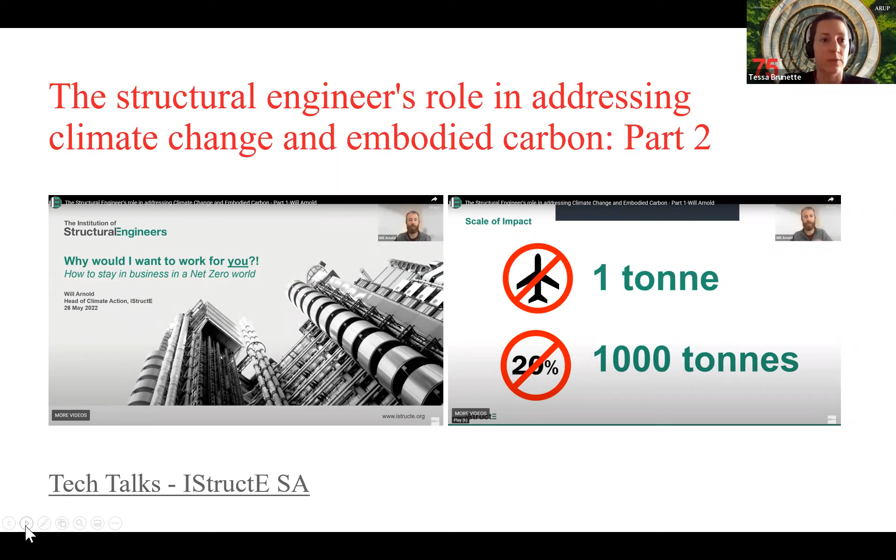It's really such an important topic, and I really want to stress the role that structural engineers can play. I would say that if you haven't listened to that, please do so. We've put a link in this talk, but equally I'm sure that Chris and his colleagues can put that in the chat as well, because the recording is available online. So I'd encourage everyone to listen to that if you have not already.

So today we're going to be doing a little bit of scene setting, just reinforcing some of the messages that Will gave last week, as well as then going through the unique content for this talk, where we'll be talking about some embodied carbon calculations that we've done for projects in South Africa. We'll then be talking about country-specific carbon factors and why that's important. And then we're going to talk through some of the research that we at Arup have done for location-specific carbon factors for 5 countries in Africa, but we'll just be using some examples from that.

Then we'll talk a little bit about some examples and some guidelines around where the best opportunities are to cut carbon. And then we're going to talk about, well, what next? What does that mean for all of you and all of us working in industry during this important time where climate action is so critical?

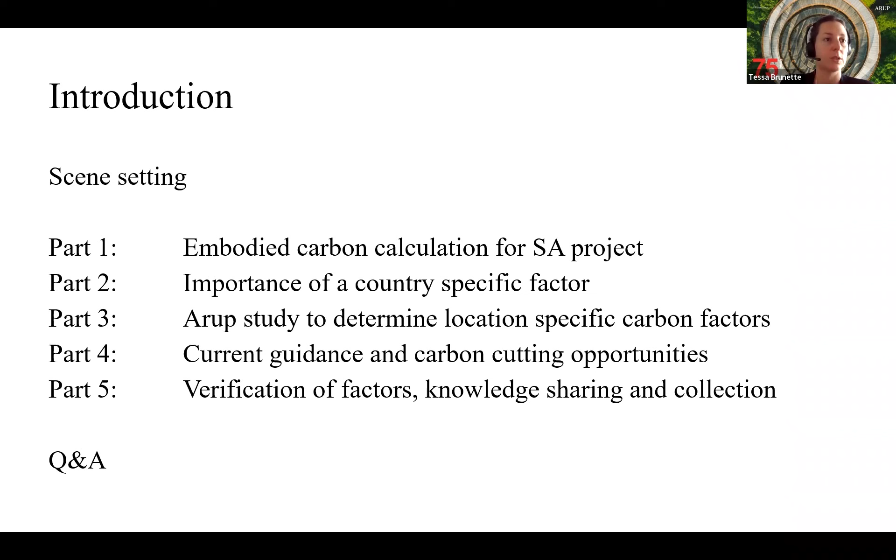So today we've got Suvarna, myself, Fiona, Maureen, and Alex talking. Suvarna, Fiona, and Alex are all based in South Africa. Maureen is in Nigeria, and I am operating between the UK and South Africa.

So a little bit of an introduction to the carbon assessment process. This is a described and defined workflow that is described in many places. RICS, for instance, has a really good workflow, as does the IStructE. All of this information is available online, and we'll give some links later on.

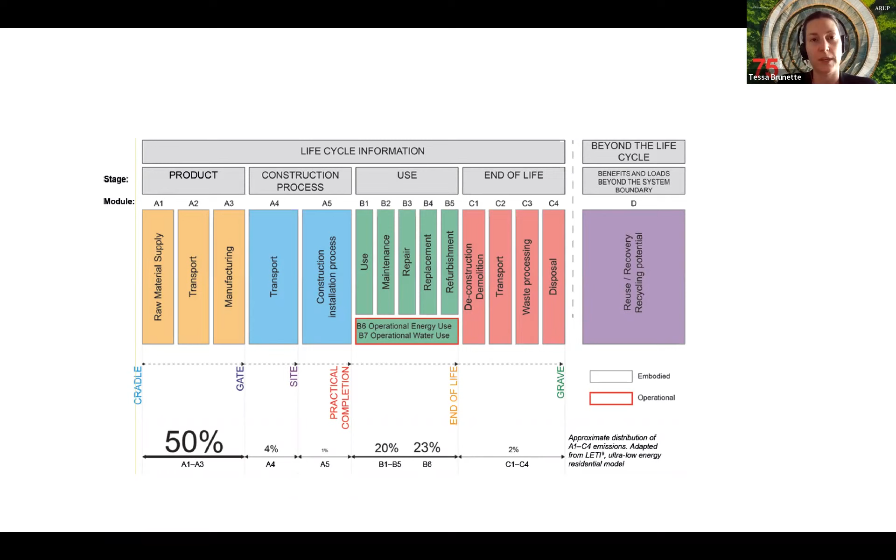But in essence, what this process does is measure whole life carbon. Within that, we have all these words: operational carbon, embodied carbon, and other related words that do have a risk of becoming jargon. What we're going to talk about today is in fact the embodied carbon component - looking at, I'm not going to use all of the letters because you can see it on the screen, but in essence what that is looking at is the materials, where they come from, how they are transported to site, and how they're installed on site.

In terms of jargon busting, there's a big risk of lots of words we don't understand necessarily. When we talk about carbon emissions in this setting, the word carbon has become jargon, although carbon is clearly an element. When we speak about it in this decarbonization setting, it should be viewed as interchangeable with greenhouse gas emissions, or GHG for short. Carbon has just become an easier word to throw into sentences.

This is the emission of gases, including carbon dioxide, methane, and water vapor, measured in carbon dioxide equivalent units. So when you see this little series of letters, really that's GHG as well.

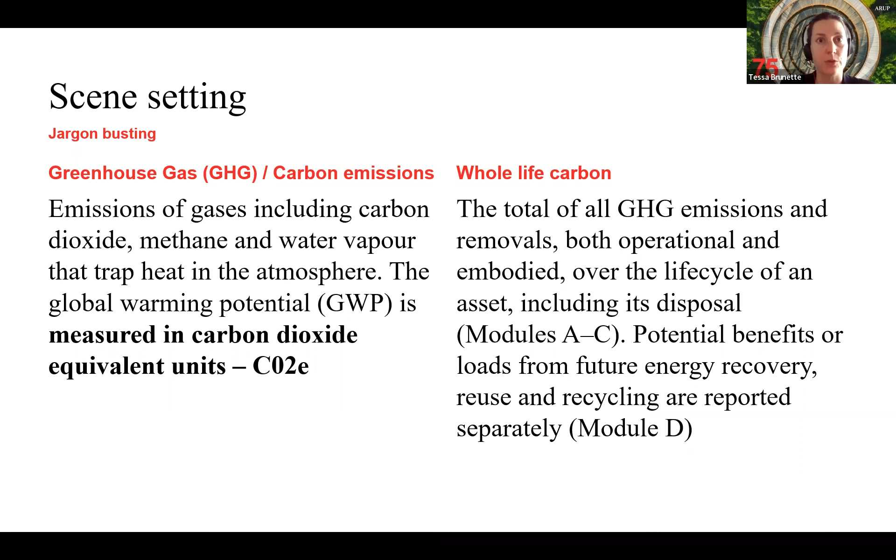Whole life carbon takes into consideration all of these GHG emissions and removals, considering operational and embodied carbon over the life of an asset, including its disposal. So if we look back at this diagram, whole life carbon is considering every single one of these pieces here.

In terms of embodied carbon, that refers to the greenhouse gas emissions associated with the materials and construction processes from A1 to C4 on that diagram we had earlier. Embodied carbon is the focus of structural engineering, because this looks at the materials that are used to build the building.

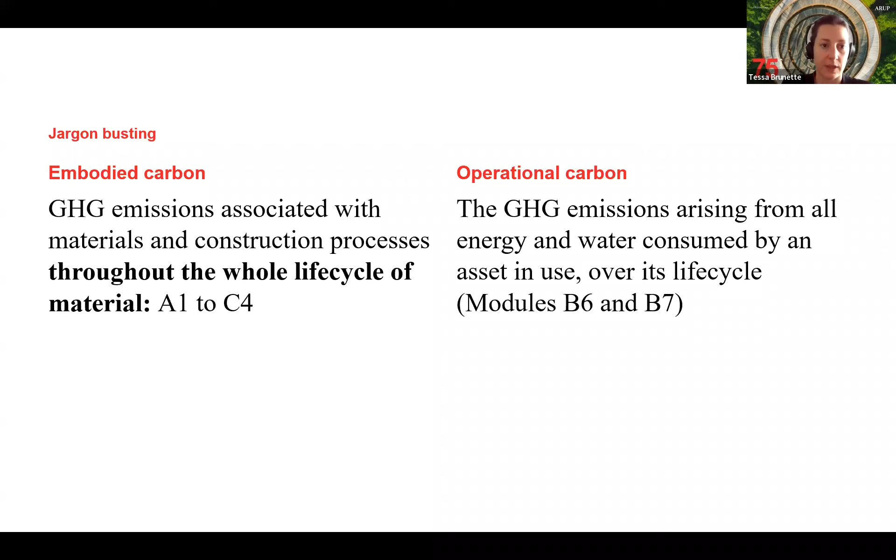Whereas operational carbon really is the realm of our mechanical, electrical, and public health or wet services colleagues, and that looks at the greenhouse gas emissions that arise from the energy and water consumed by a building in its use over its life cycle. So that's operational and embodied carbon.

In terms of embodied carbon decision-making, Will showed this decision-making tree in his talk last week. Essentially, as structural engineers and in our role influencing the design process, we need to be cognizant of when we are building, why we are building, and what we're building. So we start by asking do we need to build anything? Then how much do we need to build? Then we think about building clever, then we build efficiently, and as a last step, we minimize waste.

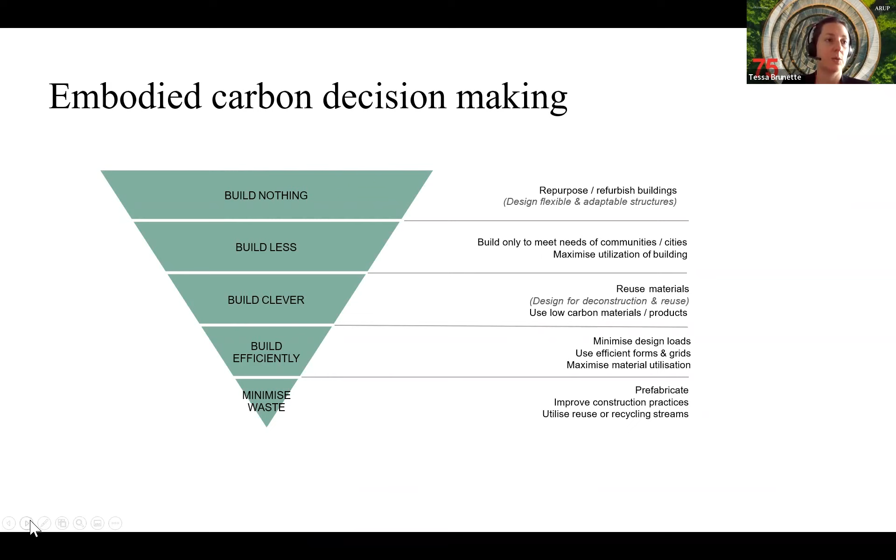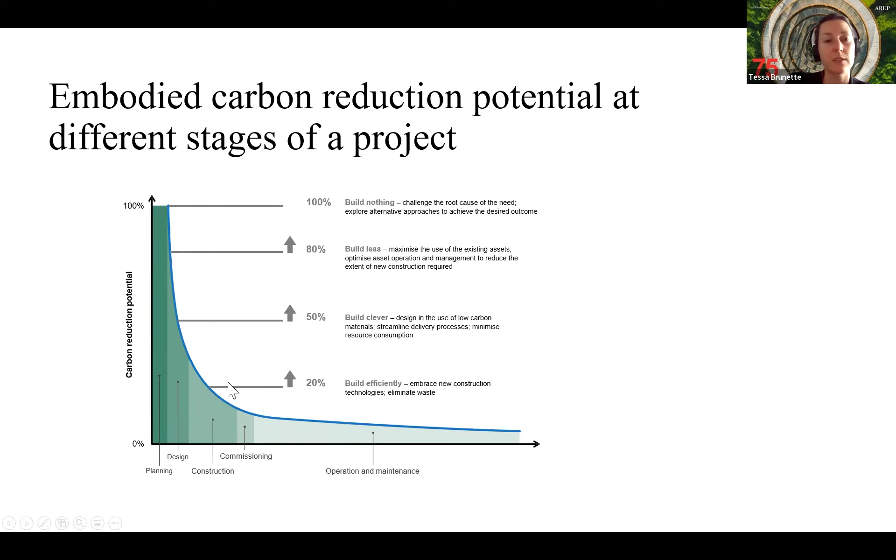It's really important to remember that the biggest impact we can have as structural engineers is actually by building nothing. So we all need to be asking these questions clearly of ourselves, our design teams, and our clients. It's also a reminder that the biggest impact we can have is at the beginning of a project. As we go down the project process, we can have an impact every step of the way, but the impacts right at the beginning will be the biggest ones, with the most impact. So the earlier our engagement is, and the earlier we start asking these questions, the better the outcome will be.

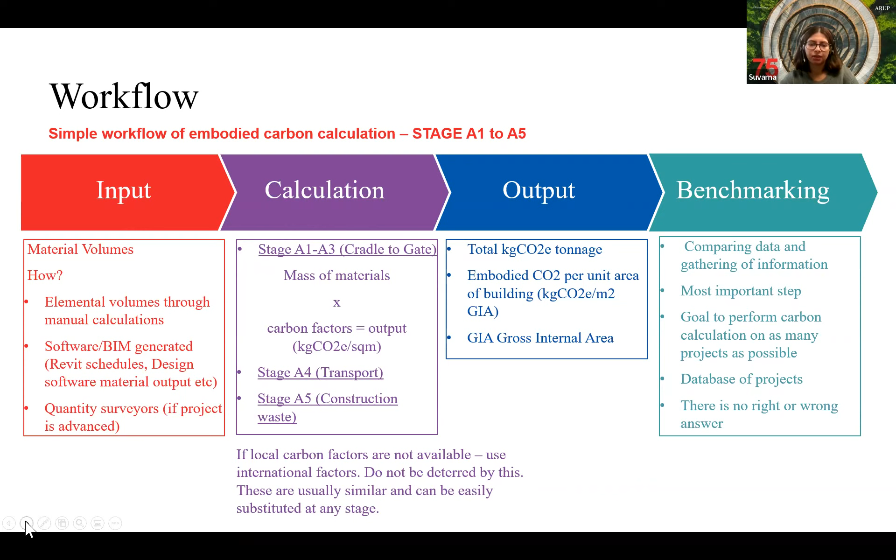Next slide. Now I'll run through an example of a residential building I did recently at tender stage. The site contained 3 apartment blocks, but for now the calculation is based on block A only. The building is a concrete frame structure with post-tension slabs, stability shear walls, and pile foundations. It contains an open ground floor parking, 3 levels of apartments, and 1 roof level for plant equipment.

I obtained elemental concrete volumes of the superstructure, consisting of slabs, walls, beams, and columns, and the substructure, consisting of pile caps and piles. Again, this is a simple task and takes less than an hour to complete, depending on your building scale.

At this stage, I use reinforcement estimates based on the volume or area of concrete to obtain the total rebar tonnage. For the post-tensioning cables, I used a reinforcement carbon factor for the calculations, as I did not have a readily available PT carbon factor.

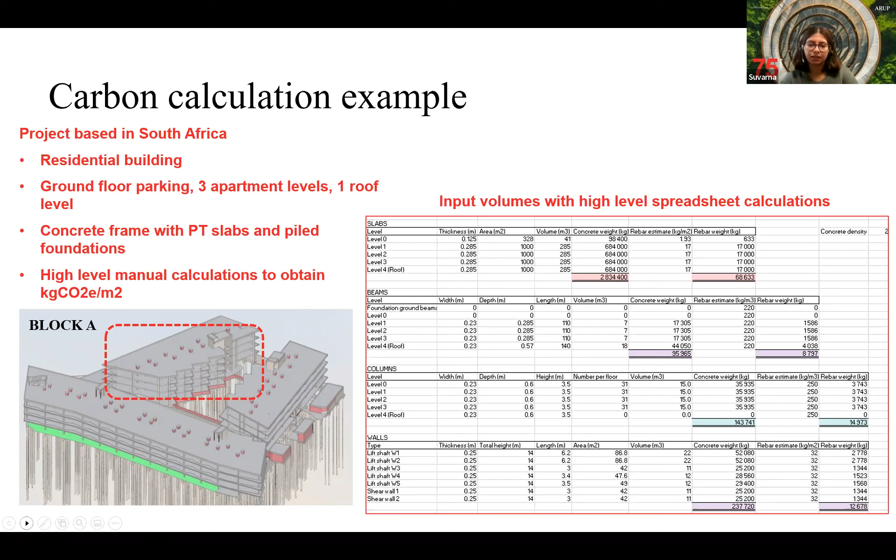Next slide, please. Once I obtained the material mass of the structure, I used a spreadsheet produced by Arup called PECC to apply the carbon factor calculation. This is one of many tools available, but is not required. The calculation remains the same.

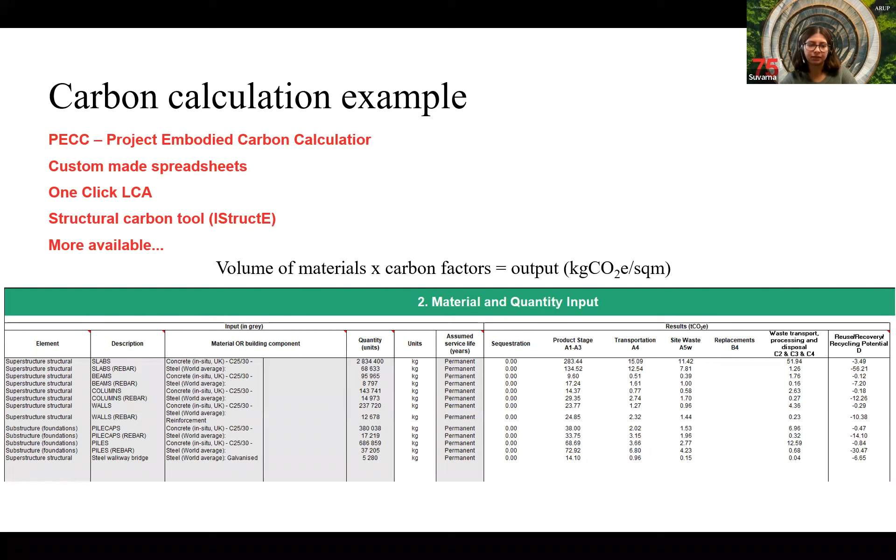At this point, I added some additional structural steel masses for canopies and walkways. Next slide, please. I calculated a total carbon tonnage of 856 tons and divided it by the GIA, which resulted in a value of 320 kilograms of carbon per meter squared.

On the right, the data is reflected in pie charts for context. The first pie chart indicates the distribution of carbon tonnage: 56% for concrete, 42% for reinforcement, and 2% for structural steel. The second chart has the material mass distribution: 96% for concrete, 4% for reinforcement, and a negligible amount of structural steel.

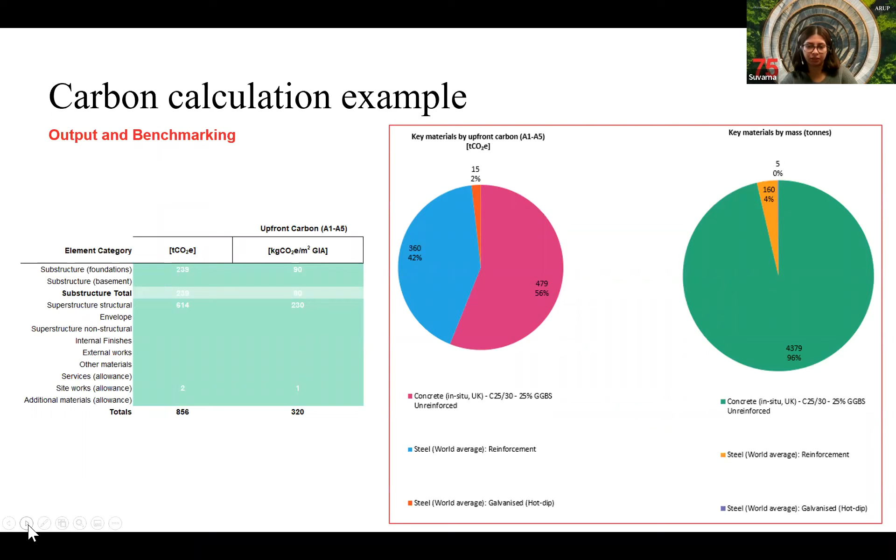Just from this data, I can see that just 4% of steel in total contributes to 44% of carbon tonnage due to its high carbon factor.

Next slide, please. I can now perform the final step of benchmarking and comparing my results. From the graph on the left, a range of values is shown in blue based on past projects. I use that to get an idea of where my building sits within this range.

I can see that I am within this, and I can now add my volumes to the same database to shape the range further, which is what our goal is, to basically benchmark against real life projects. I also use the SCORS rating system on the right, where I can see that my building falls within rating E, which aligns to a typical mid-rise building.

The next step for me is to adjust and track my calculations at different project stages, with the attempt to continuously reduce the impact the building has by making smart material and design choices. I just want to reiterate that the calculation is quite straightforward and makes the most impact when done right at the beginning. Thank you. Now I'll hand you over to Tessa.

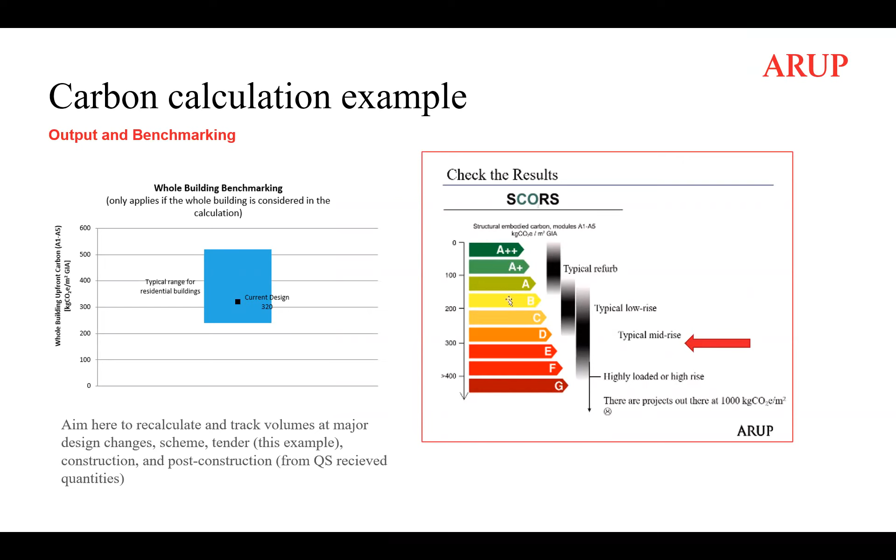Thanks, Suvarna. I'm trying to figure out how to start my camera, but I have no idea how. Start video, there we go.

Okay, thank you. So I'm going to be talking about the importance of a country-specific carbon factor. As Suvarna mentioned, she used UK-based factors in her calculation because they were readily available.

So it looks at this stage of the workflow. Essentially, we progress from the inputs, which is the design and the volumes of things. Then we do the calculation where we apply the carbon factor. Then in terms of the process, we look at the output, which is what Suvarna has described, and then conduct benchmarking. What's really important as part of this is this iterative process over the design process. So as we get to benchmarking, we can understand where our embodied carbon per square meter sits against other similar buildings, and we can actively seek ways to reduce the carbon in the building iteratively over the design life.

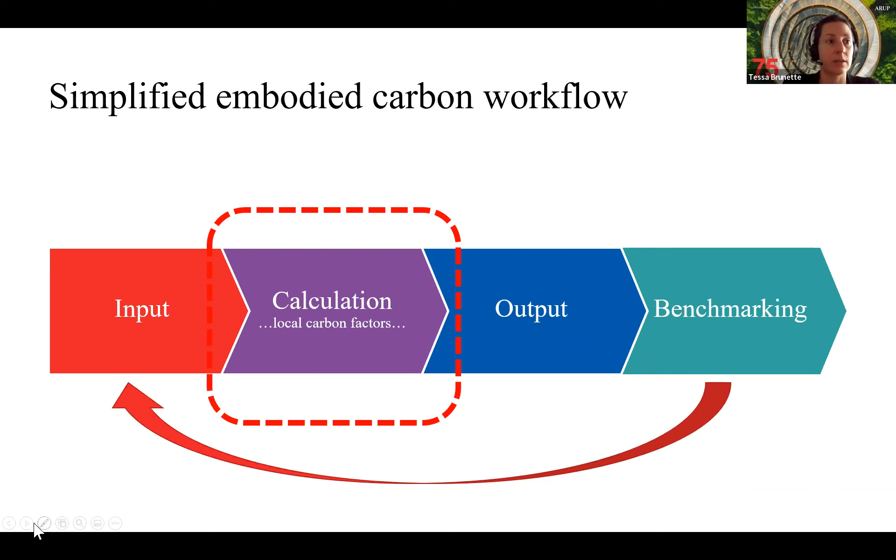So what we're going to focus on now is the calculation aspect and looking at local carbon factors. So a carbon factor, as a piece of jargon again, is the factor that's applied to the energy use or emission to understand the equivalent carbon emissions that are associated with it. And again, I just want to reinforce that this does include not only carbon, but nitrous oxide, I can't remember all of these things that are here, but it's a whole bunch of greenhouse gases, essentially.

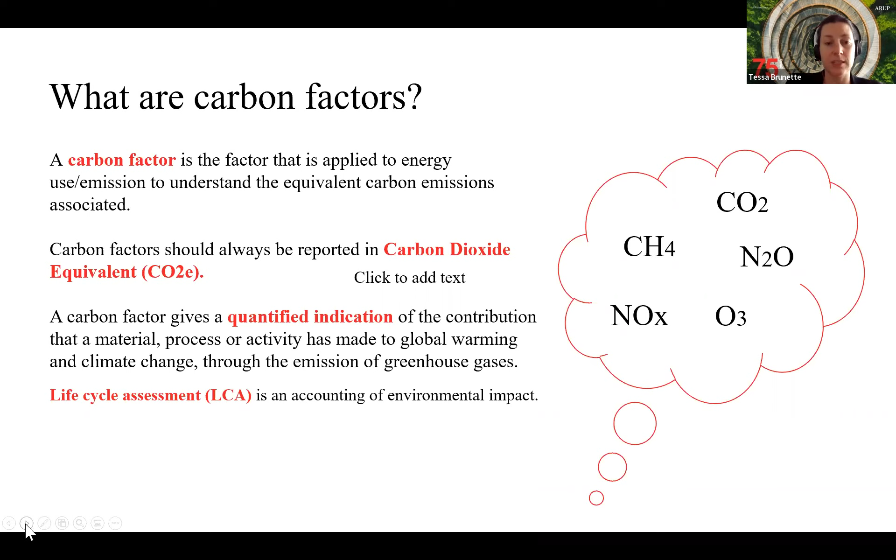They're always reported, however, as CO2e, which looks at the carbon dioxide equivalent. And this is looking at a quantified indication of the contribution that this material makes towards the global warming potential associated with greenhouse gases. And then another step in this process is looking at a life cycle assessment, and that's an accounting of the environmental impact. But again, we're looking at embodied carbon, so I'm just going to skim through that.

So key messages for this are that the carbon factors that we typically use and that are available in South Africa are largely generic. They can be UK based, they can be US based. They are internationally aggregated carbon factors. Thus far, we do not have any local carbon factors for any specific country, or in fact for the continent of Africa, that are available. If we consider that Africa has 54 countries, there's quite a lot going on there with a lot of regional variation. So these generic factors have been created by structural engineers and interested people around the world.

A lot of academics contribute to this. Equally, the building industry contributes to these carbon factors because many of the industry colleagues, they actually prepare things which are called EPDs for the various products and materials that they sell. And that means essentially that they go through the process of calculating the carbon factor for their specific product or material. So essentially, this takes into account where the specific material or product came from, what is the source of that, and all the transportation involved in its movement and its processing until it reaches site. That's what we're looking for. That is what the carbon factor looks at.

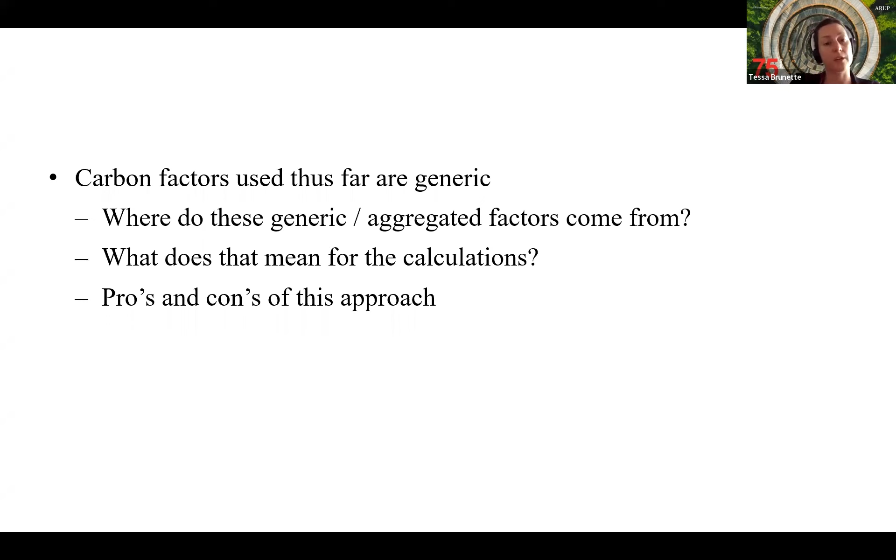In terms of carbon factors, international versus local, they are generally comparable. The differences tend to be related to transport. For instance, if we in South Africa are mining iron ore, sending it to Australia for processing and converting into steel, then shipping it back to South Africa before it's processed again and installed on a building, all of that transport adds to our specific carbon factor for South Africa. Whereas if it was all done in Australia, that carbon factor would be lower.

Another factor that tends to differ between local and international carbon factors is the grid energy supply. If you're using a fossil fuel-based electrical network for processing, that carries a higher carbon emission. Whereas if the energy mix is entirely or largely renewable, your carbon factor would be lower.

What we tend to see is that steel is similar across the world. However, there tends to be quite a bit of variation between products such as bricks, so masonry units vary quite a lot. Timber also varies, but we must remember that because of its property as a renewable resource, the sequestration attached to that product during its growth cycle is significant. So even when we add transportation onto that, the carbon factor of timber is still very low.

The key message here is that we need to understand what the material value chain is for each of the products in country, because we can then apply best practice and use our own engineering judgment to choose and decide on ways forward in support of embodied carbon calculations.

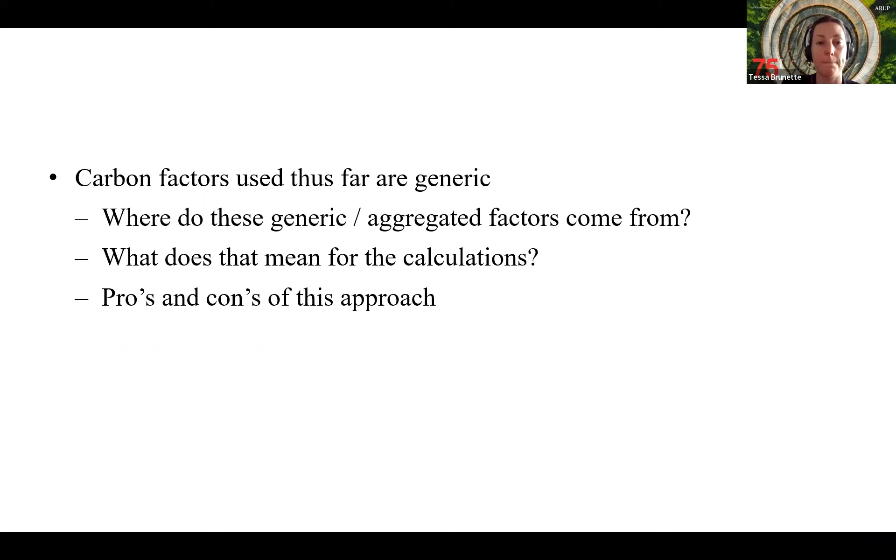Thank you, Tessa. So Arup, hi everyone. Arup, as part of their internal research program, have invested in two studies to better inform our drive and commitment to low carbon building design in Africa.

The aim of the study was to establish and validate a set of location-specific carbon factors, as Tessa just mentioned, for common construction materials. We focused on four countries where Arup currently have offices, namely Kenya, Mauritius, Nigeria, and South Africa.

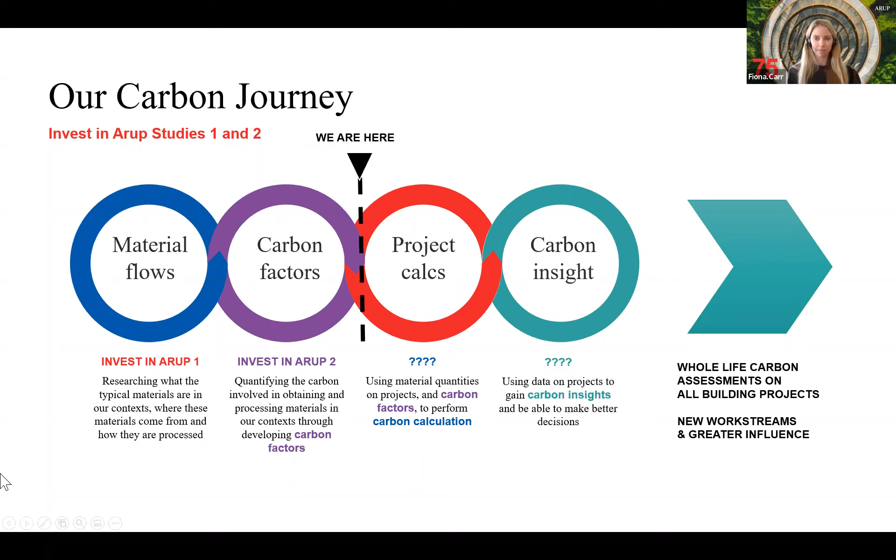I keep clicking. Sorry, I didn't realize there was a... There we go. Thank you.

The bespoke methodology we developed in study two was centered around three different ways to calculate a carbon factor, depending on the information available. These consisted of a location-specific factor, a blended factor, and/or an energy-tailored factor.

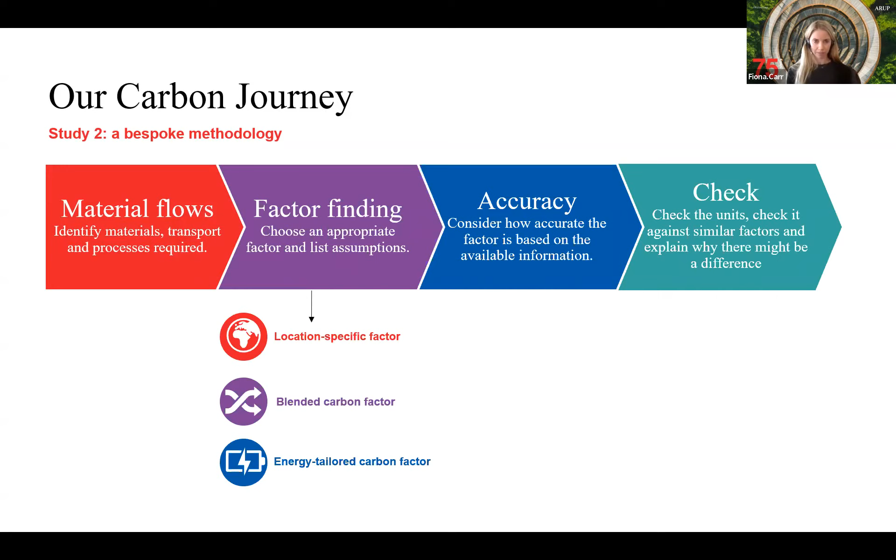Our guiding principles throughout the study were to remember that data collected needed to be from the correct, appropriate geographical region. We needed to remember that data collected should be representative of current technologies and processes used. Considering future technologies was not recommended during our study. We needed to remember that our data needed to be recent, and that thus far, the factor calculated is an estimate and a start to our carbon journey.

We needed to list all assumptions along the way and needed to note our level of accuracy when reporting any factors. We also needed to remember that this was an iterative process, that we couldn't get a perfect factor the first time, and that it is something that will need to be developed as we continue this journey.

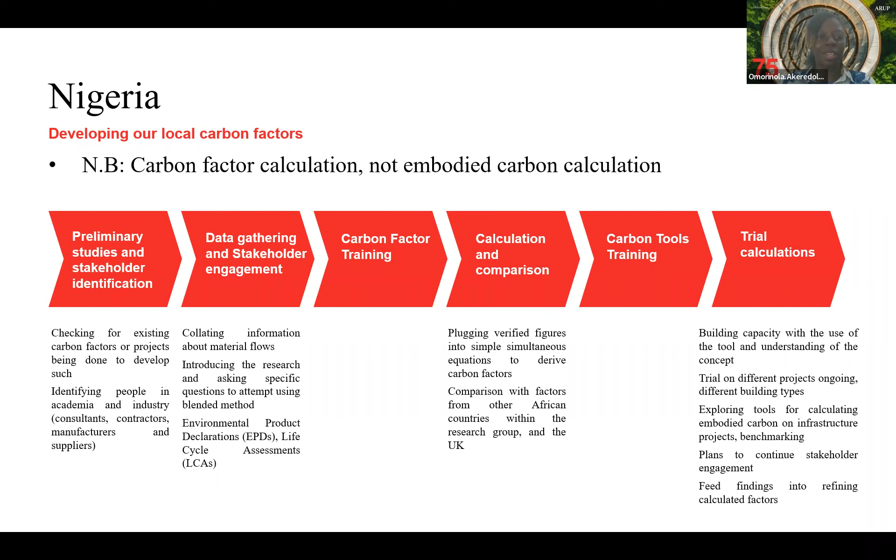The specific materials which we calculated carbon factors for in Nigeria are steel, concrete, blockwork, aggregate, and timber.

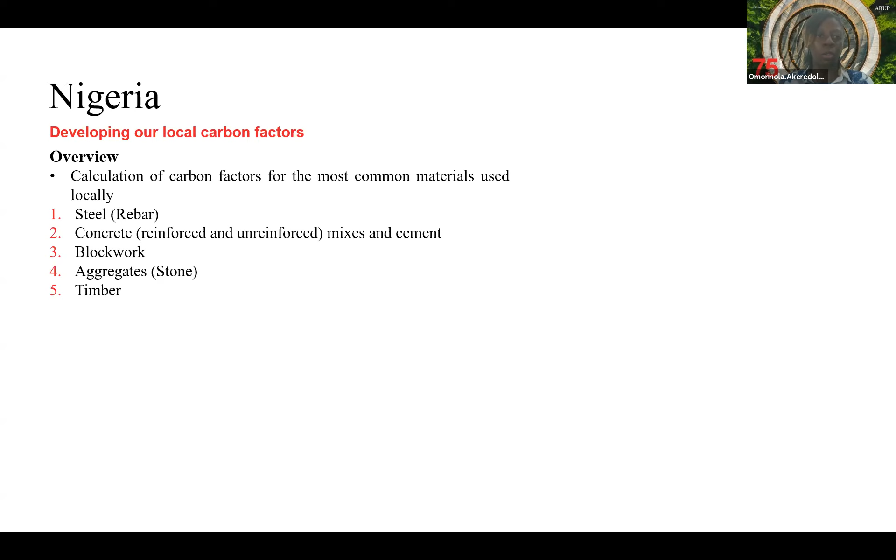From this engagement with stakeholders, apart from getting specific information on these materials, we were also able to learn about plans which these stakeholders had regarding introducing more sustainable materials, replacements for ordinary Portland cement, and so on.

Going into the calculation proper, we referred to existing databases of information. For the A1 to A3 and A5 stages, to calculate the carbon factors, we made use of UK carbon factors as well as UK grid emission factors.

Thankfully, we were able to find grid emission factors for Nigeria, so it was a case of using simple simultaneous equations to derive carbon factors for these stages for Nigeria. Then moving on to the A4 stage, which was primarily about transportation of materials to site.

What we had to do was refer to the IStructE guidance document on transport emission factors for different modes of transportation. Based on assumption and experience on various projects, we calculated typical distances materials would travel within states and across states in Nigeria, and used these figures to calculate the carbon factors for the A4 stage of projects.

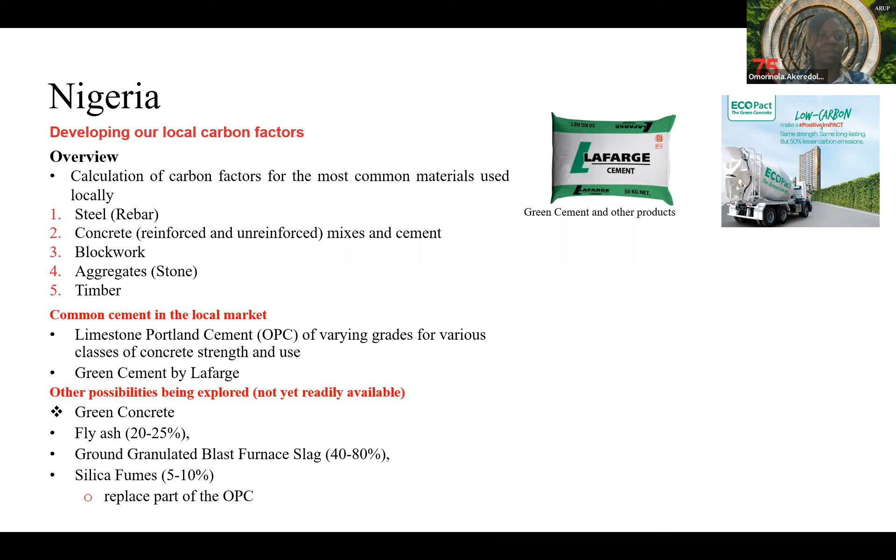One thing we would definitely look to do much better in future, or advise anyone looking to carry out this kind of study, is to first test the awareness level of stakeholders, try to upgrade that awareness level, and then ask the necessary questions. This would most likely reduce any reluctance stakeholders may have regarding providing information that would help in your calculation.

With regards to the confidence we had at the time we carried out this study, the confidence in the carbon factors calculated was not so high, primarily because we were focused on getting location-specific data, which we did not get. But as Tessa and my other colleagues have mentioned earlier, what's important is using the carbon factors that are available.

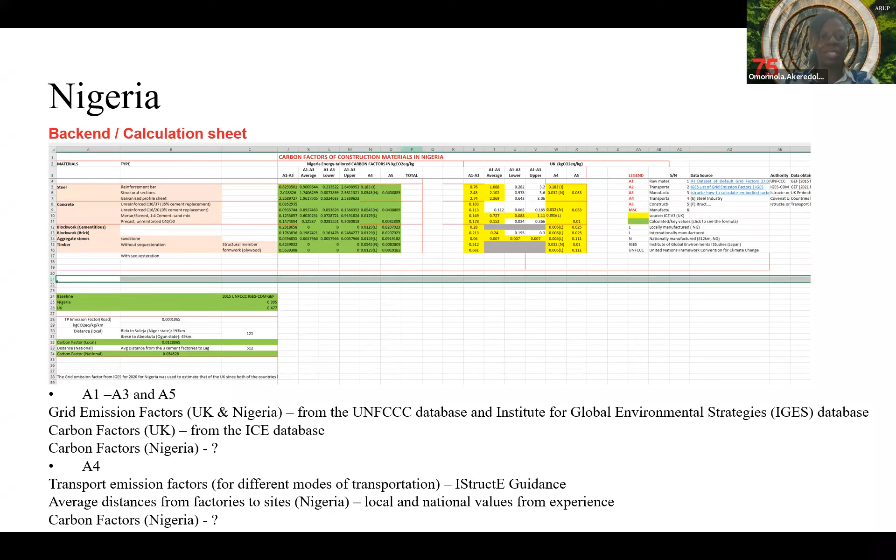And ensuring that the carbon emissions are indeed being reduced on projects. Okay, so just a run through on one of the projects where we used the PECC tool to calculate the embodied carbon. This project is actually the Office of the National Security Adviser in Nigeria. And although the project already has a lot of sustainability gains with regards to reducing the amount of energy required for cooling and so on, we explored how much gains we would have had on carbon emissions if we had considered embodied carbon at the start of the project.

We got our results and found that when compared to other structures of similar kinds, the embodied carbon was actually significantly higher. So going forward, we'll be looking to compare our new designs to that project, benchmarking our new designs to make sure we're reducing with reference to it. Thank you very much. I'll now hand over to Alex.

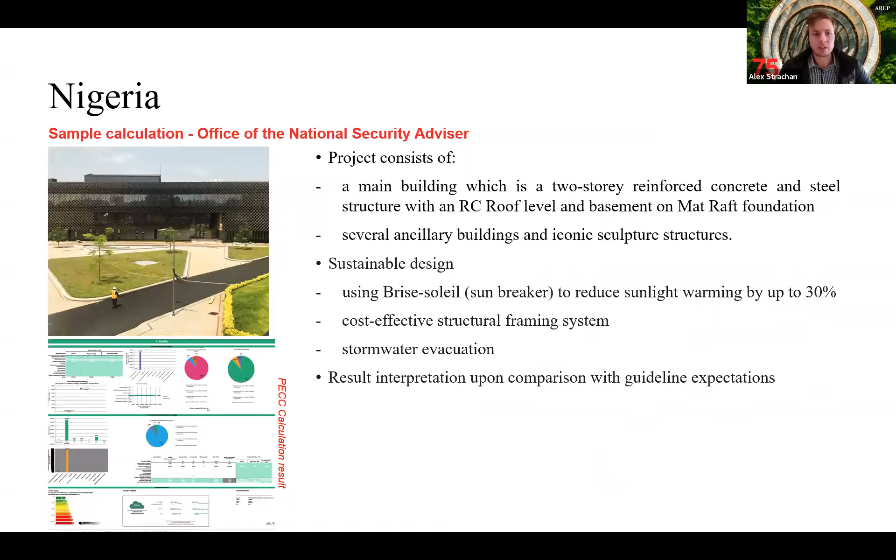Today, for my part of the presentation, I'll be covering the current guidance and the carbon cutting opportunities that are available to us as structural engineers.

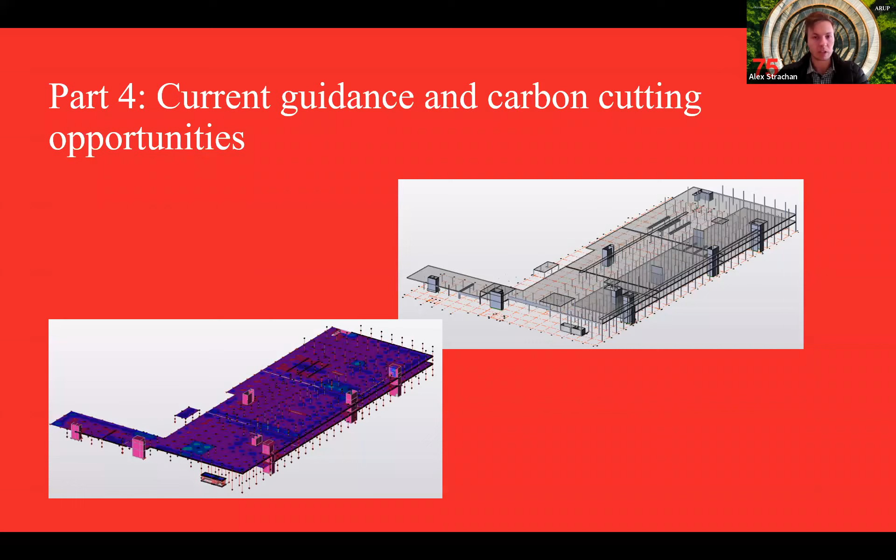Okay, so basically I just want to give an overview of the benefits of this exercise. As Tessa mentioned in one of our previous slides, the biggest impact we can make for our projects is at the initial stages, at the onset of our engagement. So making these upfront decisions can be vitally important for us to make the biggest savings for the carbon footprint of the structure. So initially, when we are involved in the project, we are presented with a set of plans.

Or layouts from the client or the architects. And my initial step for engaging into the project is to look at ways in which we can maximize the structural efficiency of the building. So that would be my typical workflow, exploring various opportunities to look at the efficiency of the materials and to see how we can achieve what we need to, aligned to the designer's intent.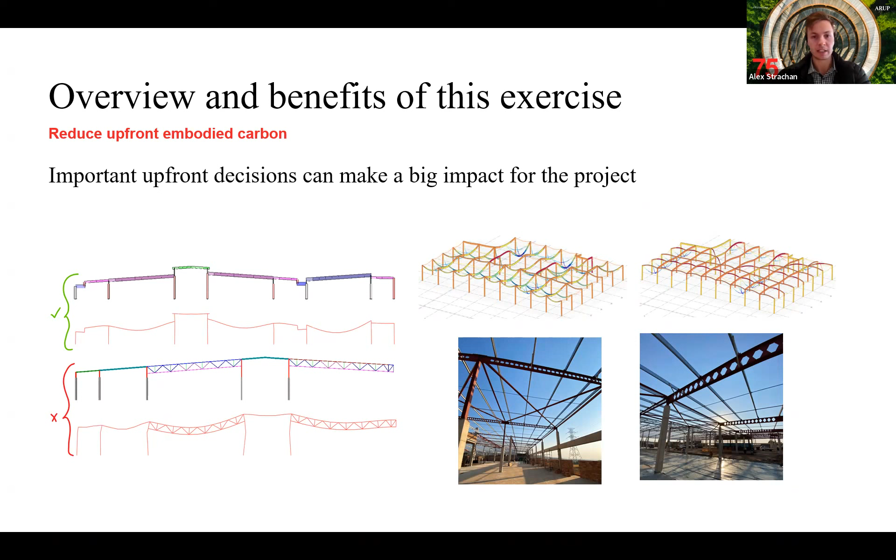So the initial assessment, when we receive the layouts from the architects, would be looking at the materials we're going to be using, the grid spacing of the building, and geographic location-specific items. Understanding the context of the design is important to understand what is looking to be achieved. This would be the point at which I would start to see what the architect is looking to achieve, and then how we can rationalize the design and present new ideas for them to look at, to see if we can achieve a better structure still in line with their design.

Past examples of this would include basements, for instance, where we've had projects where the architect is looking to introduce a new basement in a specific area on the site to provide access for two different areas, and this can easily be omitted by transferring access stairways to various other locations on the site. Or retaining structures - if we receive a geotechnical report and can see that the angle of repose of a bank doesn't need a retaining structure, then we would normally present this to the client or architect to see if we can achieve it without introducing additional structure.

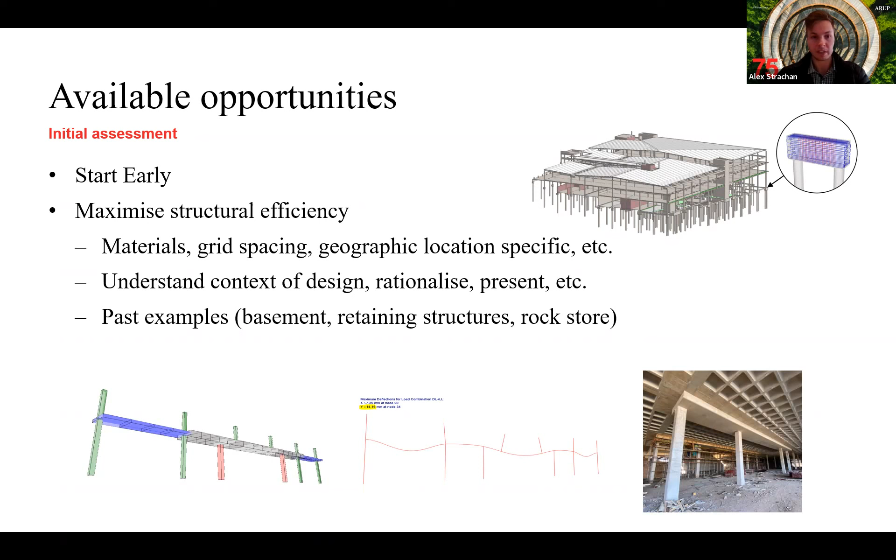On one of our most recent projects, we introduced a rock store, which is essentially a heating and ventilation assisted system to achieve a better energy rating for the building. But that's essentially a room full of rocks and a very heavy structure. On that particular project, the architects actually wanted to present the space on a suspended structure. This was an immediate red flag for me, where I asked the architects, can we move this to another area which is on grade? And this proved to be a significant saving for the building. These are typical steps I would undertake right at the beginning of the project, where we can look to really make a big saving to reduce the carbon footprint of the structural materials.

One of the biggest opportunities for us as structural engineers is the use of materials. I like to use the system of the 4 Rs: reduce, reuse, recycle, and recover, and apply this to all the materials across the site.

For instance, initially we would look at limiting the carbon intensive materials. As you saw from Suvarna's presentation, concrete and structural steelwork have a significant effect on your embodied carbon. So if we can lower the carbon intensive materials, this would prove very beneficial, as well as choosing lower carbon alternatives and sequestering materials.

For instance, timber, if we can see based on its historic data that it's preferable, we would go for that if we can. Obviously there are instances where this isn't achievable, but then we could look at the EPDs of the material to get a better informed decision of what materials we can use.

This would carry on to look at local materials to cut down on transportation costs, and fewer finished materials. For instance, using polished concrete carries a lot of weight in terms of saving on the carbon footprint of the project, as well as possibly unfinished ceilings. We found this makes a very big impact on our output.

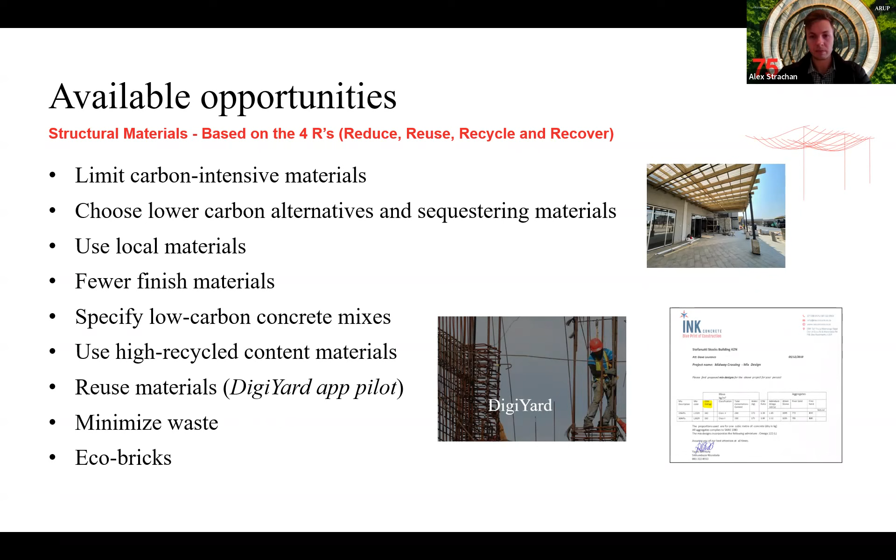Another example of this is eco bricks, which are also very beneficial to use as void formers. We've used this on past projects successfully, and I would encourage you to look into this further as well.

Lastly, I'd like to touch on strategic design when undertaking your scheme work in the initial stages of the project. For instance, providing flexible internal space is a key aspect here. This would normally allow for future use, to future-proof a building or space to avoid the scenario of demolition, which has proven to make for a very big saving.

As well as the reuse of buildings and spaces, this was touched on previously as well. To build less and minimize demolition, we are always looking for opportunities on new projects where we've got an existing building to maximize the repurpose of that structure as opposed to demolition.

Another component here is the prefabrication of elements as opposed to on-site work. This normally cuts down on wastage, and there's a better component of QA as well. Lastly, to design for disassembly. We've seen this becoming quite a predominant factor in our design these days, with steelwork being designed for disassembly, where we can reuse the structures in the future as well.

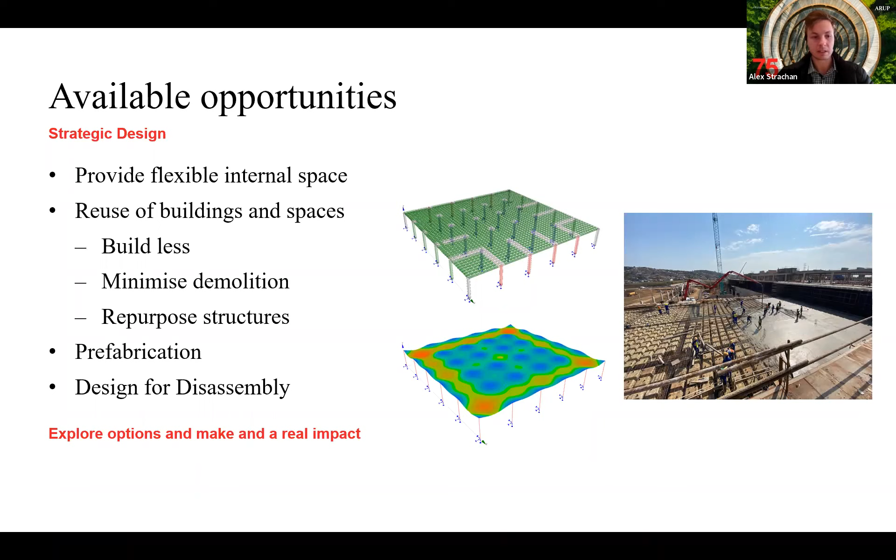Lastly, I'd like to encourage you to explore these options, and as structural engineers, we can make a real impact on the work that we carry out. Thanks very much, I'm going to transfer back to Tessa.

Thanks, Alex. So I'm going to end off with a little bit of a conversation around next steps, and what we're trying to do and what we as an industry need to be doing.

The first thing is, I think there's an opportunity for confusion between certification tools and embodied carbon calculations. As it stands at the moment, most certification tools, and certainly none available in South Africa, don't actually account for embodied carbon. The EDGE tool being promoted by IFC does include it to an extent, but it's quite simplified, and we can have a separate conversation about that. It's worthwhile, but not very in depth.

We need to be very clear that there's a distinction between a certification tool, which is used by, for instance, the Green Building Council of South Africa, and embodied carbon calculations.

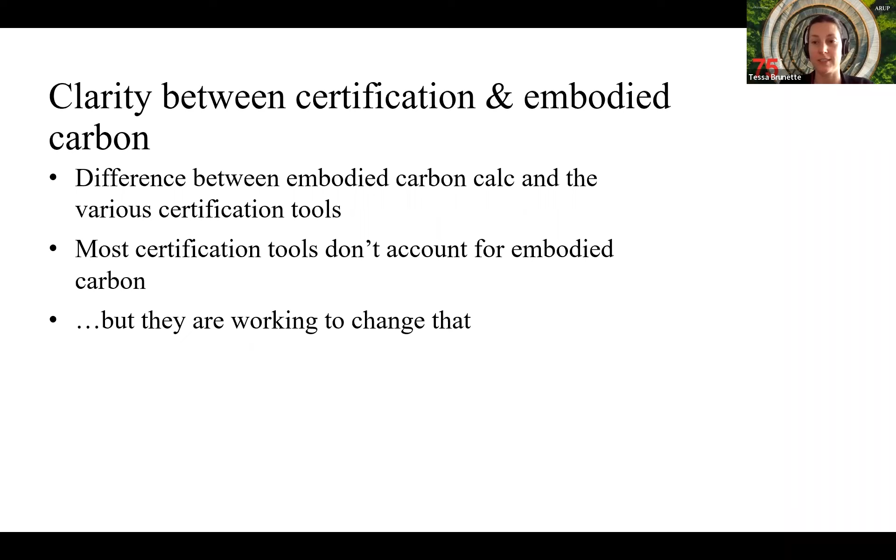Embodied carbon calculations stand independently of certification, and it's a process and tool that every structural engineer ideally should be using throughout the design process, irrespective of whether the building they're working on is seeking certification or not. At the moment, the Green Building Council of South Africa is seeking to create a credit that looks at embodied carbon within their net zero tool, but that's a work in progress and may only come out in a while. So I want to reiterate, certification and embodied carbon calculations are different things, and as structural engineers we need to be conducting embodied carbon calculations often throughout the design process, irrespective of certification.

In terms of looking ahead, we're working together with the Green Building Council of South Africa, the GBCSA, to understand how we as an industry can be promoting and educating with regards to embodied carbon and the need to reduce that in our building design. This is a work in progress, conversations that we've started and that we're very happy to be part of.

There is quite a need to be sharing information. The carbon factor calculations that Fiona and Maureen spoke about earlier in this talk are critical, and the information that feeds those calculations is actually the basis of this. For instance, what Maureen spoke about is that she was using aggregated data to plug the gaps in her particular calculations. We do live in what can be quite data-scarce environments.